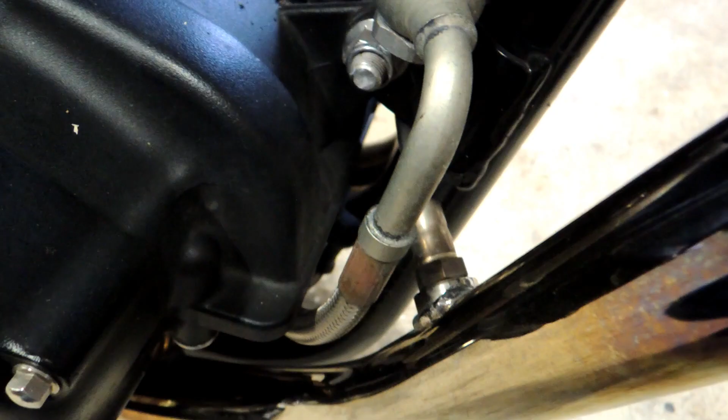So a little quick video here on oxygen sensors, or Lambda sensors if you're from the UK. They all work the same way whether you're driving a car, a truck, a motorcycle, whatever it is. They're all exactly the same. They work the same way.

And the point of an O2 sensor or Lambda sensor is to give the computer a reading on the oxygen level in the exhaust so that the computer can adjust the air-fuel mixture. And it would do that for two reasons. One, for emissions, so to keep emissions down, but also for performance.

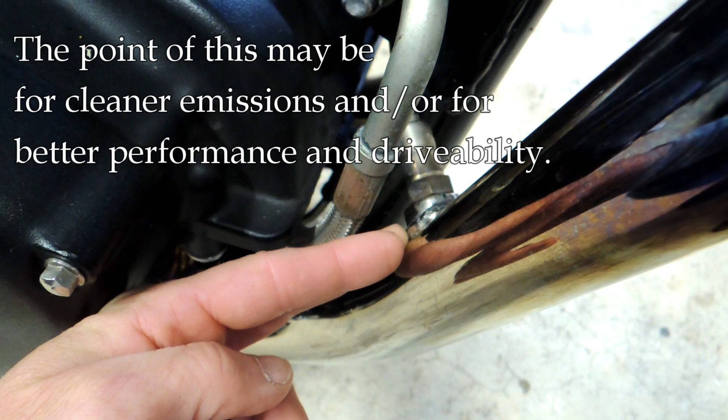So when you look at an oxygen sensor, it isn't necessarily just for an emissions thing. A lot of people try to remove them. Some computers are using it also for performance as well. So keep that in mind if you're thinking about removing one.

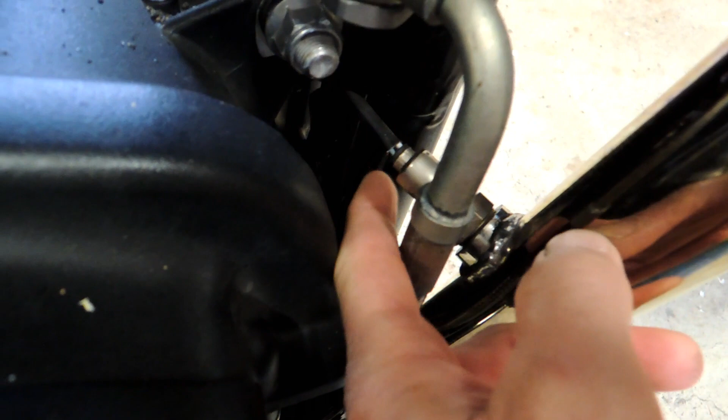All right, now oxygen sensors do have some different designs in one sense here. I'll show you some other bikes in a second, but this particular one right here has 3 wires, but you may see oxygen sensors with 1, 2, 3, 4, and I think there might even be a 5-wire sensor for different reasons. Now the point of this is that an oxygen sensor, the way it's constructed, it needs heat in order to work correctly.

So it's always mounted in the exhaust, pretty close to where the exhaust is coming out of the cylinder usually. And sometimes on cars you'll see 4 oxygen sensors, where you'll have 2 before the catalytic converter and 2 after the catalytic converter. And in that case, it's trying to measure the effectiveness of that converter.

But on a motorcycle, usually you have 2 or sometimes 1, or sometimes 1 for each cylinder. But in any case, you'll see different amounts of wires going to the sensor. So the different wires are for these reasons. If you have a single wire oxygen sensor, that has a signal wire, and that's just a voltage being applied to that wire, and then it uses the exhaust system itself as a ground back to the battery. That's a single wire O2 sensor.

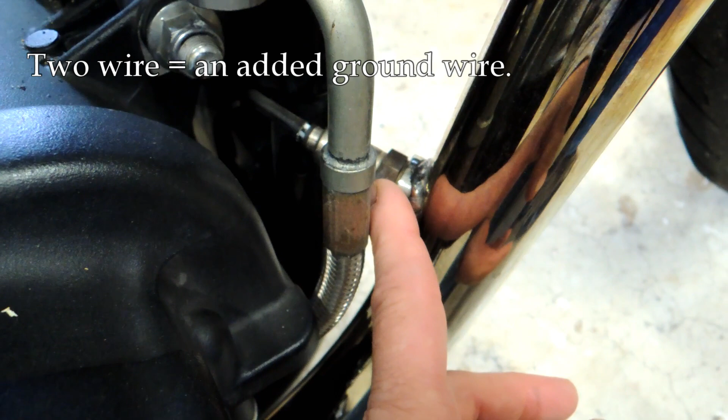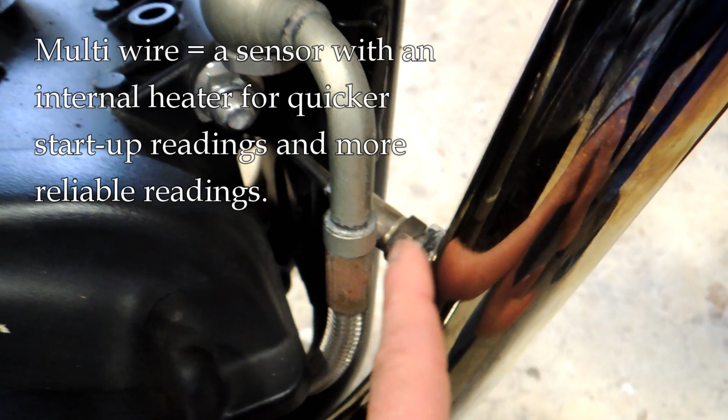If you have 2 wires, then it has a signal wire with the voltage, and then another wire which acts as the ground. So it doesn't use the exhaust as a ground, it has its own ground, which is usually more reliable. If you have a 3-wire or a 4-wire, that has a heater built into the oxygen sensor itself. So you have 1 wire for signal, 1 for ground, and then another one for a heater that's built into the oxygen sensor, and that heater may also have its own ground, which is the 4-wire.

And the point of that heater is that it wants to heat up this sensor quickly, so when you first start up the bike, it starts heating that sensor for you rather than waiting for the exhaust gases to heat up the sensor. And that gives you a more accurate reading immediately rather than having to wait 4 or 5 or 6 minutes for it to heat up. So that's just a different design philosophy, but they all work the same way.

And the way the signal works is the computer wants to see a voltage between 0 and 1. So as this sensor is measuring the gases, it's going to vary that voltage back to the computer, and the computer interprets that voltage change as different oxygen levels in the exhaust system. So typically you're going to see the reading somewhere in the middle of that 0 to 1 volt range. You're going to see 0.4 to 0.6, or 0.7 or 0.8 sometimes, but you don't normally want to see an extreme. So it's normally somewhere in the middle there.

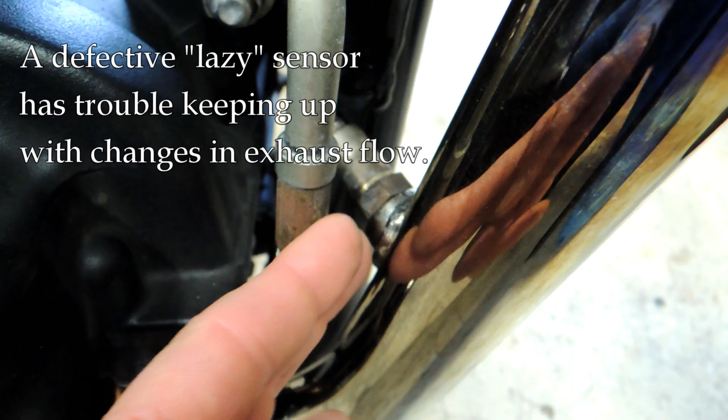And if the sensor is working correctly, as you blip the throttle or change RPM, you're going to see the oxygen sensor respond if you're reading it on a meter. And an oxygen sensor can also sometimes be working, but not working very well. Those are sometimes called lazy oxygen sensors, and basically the sensors become kind of mucked up inside, and it doesn't respond quickly to changes in the exhaust. But you do want to see it respond quickly.

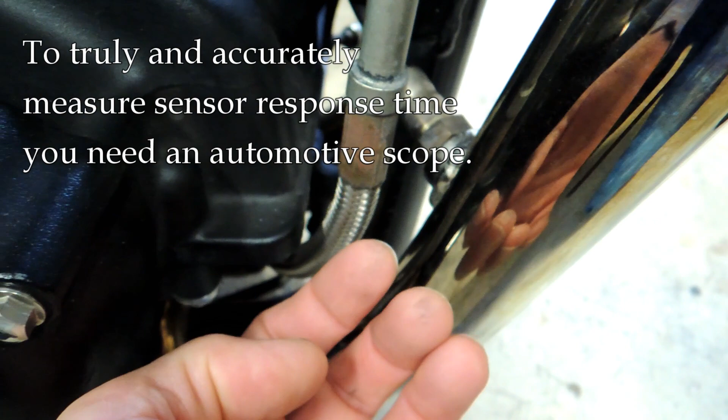So if you're looking at a meter and you're blipping the throttle and you're not really seeing the oxygen sensor respond quickly, there's a delay and it's kind of slow, that could be a problem as well. So even though it's working, it's not working well enough for the computer.

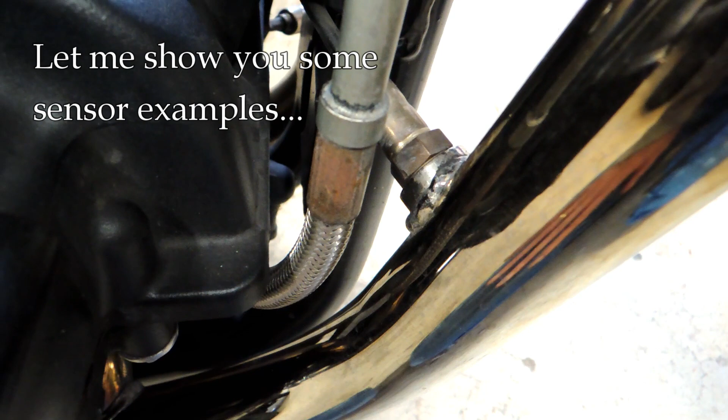So basically, the oxygen sensor has a signal wire that's important to you as far as testing it, and it needs to see a voltage between 0 and 1, and we want to see typically somewhere in the middle, and we want to see a quick response. Those are the things we're going to be looking for as we actually test one of these.

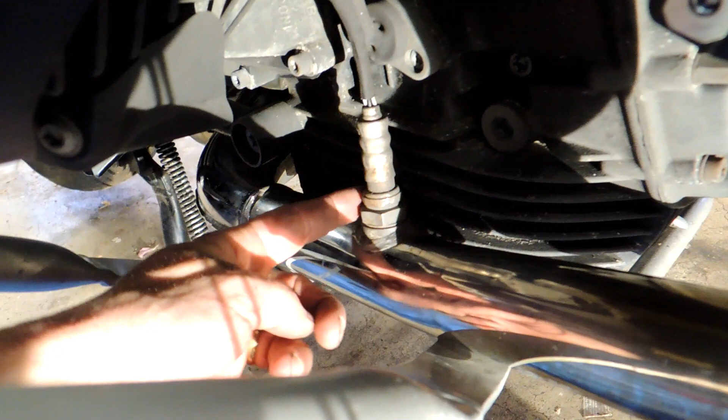Now here on the Triumph Bonneville, the oxygen sensor is located again. Here's the exhaust, here's the sensor, and then this is also a three-wire sensor there, and of course there's one on the other side. It's always a duplicate. Now here on the R1200 RT, which is similar to the GS, here's the cylinder head, right? Here's the exhaust that comes out, and the oxygen sensor is right here. Now this one is a three-wire sensor.

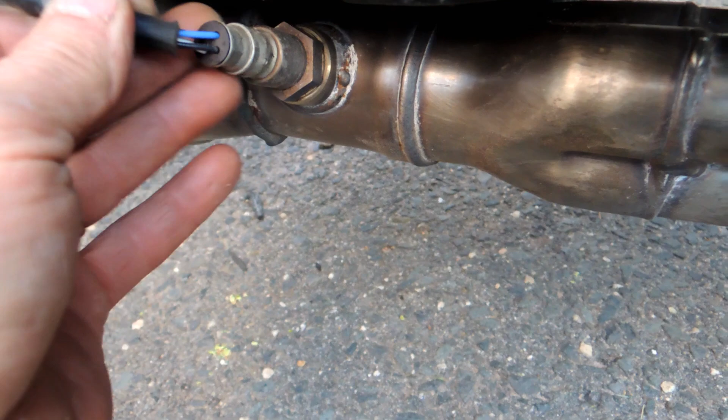Now here's a Yamaha FZ09 or MT09, same thing. Again, here's the exhaust coming out, and it has a sensor right here. This is a 4-wire sensor. Here's a Triumph Tiger 800, and the O2 sensor is buried behind this little guard here. So that's a little difficult to get to, but it is there.

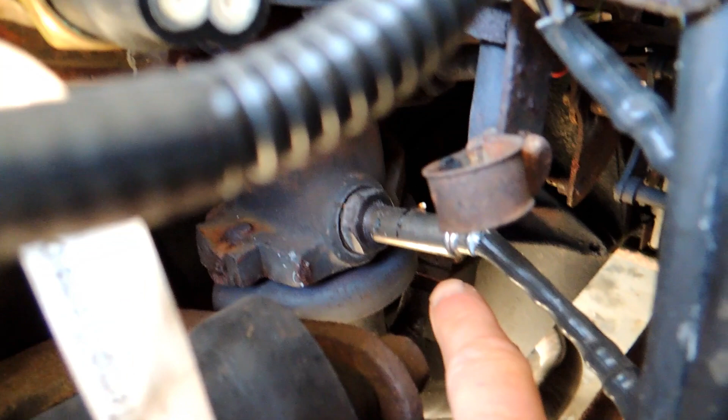Now, you're not looking at a bike here. This is an old Jeep Wrangler, it's actually a 1990. And if you look down here at the exhaust, here's the oxygen sensor. Whoop, where am I? There. So it looks exactly the same as a motorcycle because it is the same as a motorcycle. Oxygen sensors, whether it's automotive or motorcycle, are all going to be basically the same, and they all look the same.

Before I get too much further into this, I'm going to focus on testing these things, and we'll be testing them in the vehicle or the bike itself. However, I just want to mention, if you do need to remove one of these to replace it, there's two ways of doing it. You can see the hex nut there, which is part of the sensor itself. Ideally, you'll remove the connection to the computer, the wiring here, and then take a box wrench or a spanner and slip that over the wiring so that you get it connected on the nut here.

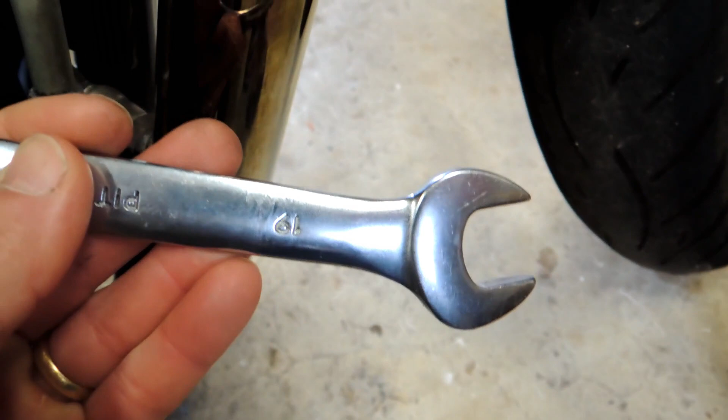And then because this is an exhaust system, it gets hot and these things tend to get ornery trying to take them out. So ideally, you have that box wrench around it, and you just give this end of the handle a whack with a hammer or your hand, and that will usually loosen it. I don't recommend using a long pipe or something like that because you may distort the exhaust or even break off this connection to the exhaust, which is welded on here. So ideally, you get a box wrench on there, give the end of the handle a good whack or a few good whacks, and that'll loosen this.

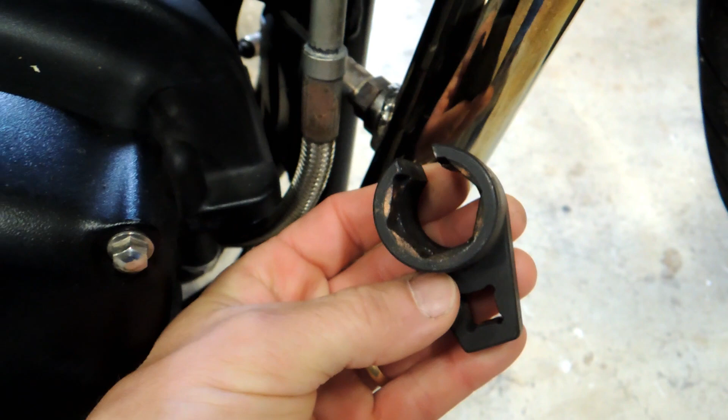And then when you put the new one back in, it usually comes with a little bit of copper-based anti-seize on the threads, and that'll help for the future getting this out. The other thing you can do is they do make a special tool, so if you can't get a box wrench around it, you can buy one of these tools, and this has an area right here to slip over the wire, and then kind of a socket here, and then you put your socket wrench on this part right here. They work pretty well, but the box wrench is my first choice if I can.

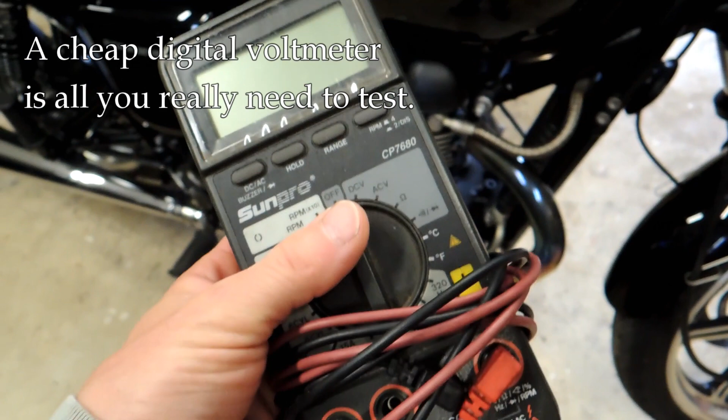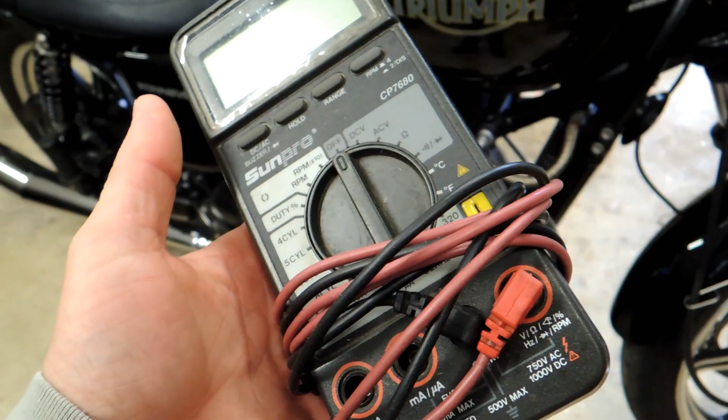Now, as far as testing these in the bike, there's two methods you can use. One is just a regular meter, we just need a voltmeter, and any old thing will do. It doesn't have to be particularly special. Digital is fine, and I'm going to show you this. I think I'll actually test this in a car just because it's easier to get to, but you can use just a regular voltmeter. The other method would be to use software on a computer or sometimes on a phone that's connected to your bike so you can see what the computer is seeing.

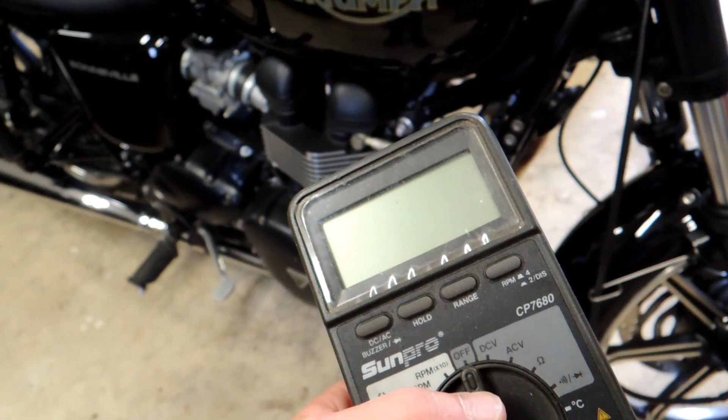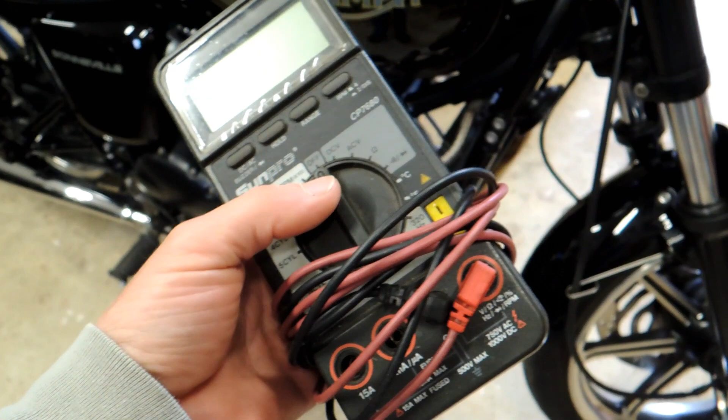And in one sense that's superior only because you are seeing what the computer is seeing rather than what a meter is seeing, because there are other areas in the wiring that could be a problem that you could catch if you're looking at what the computer is seeing rather than what the meter is seeing. But if you're going to use a meter, all we need to do is connect it to the signal wire, and that's it. If you're going to use the computer, then you need to have the software available to do that.

So I'm going to show you here on my Triumph. There's free software available called TuneECU you can use. I'm going to show you a BMW, and there's different software for that. I'm going to use a special device for that. All right, first up, I'm going to use this Jeep as an example just because it's easier, but I swear to you, they're exactly the same.

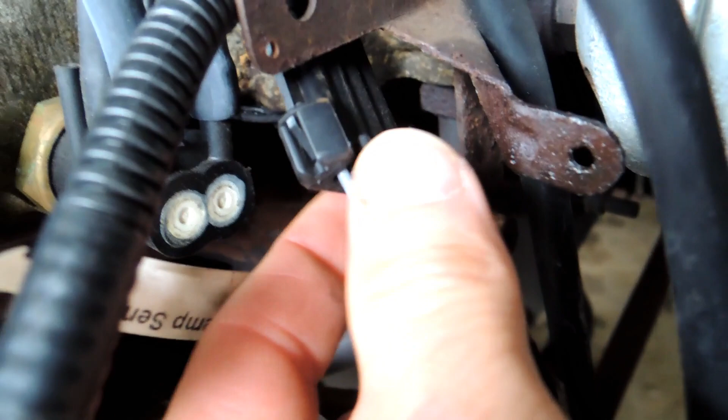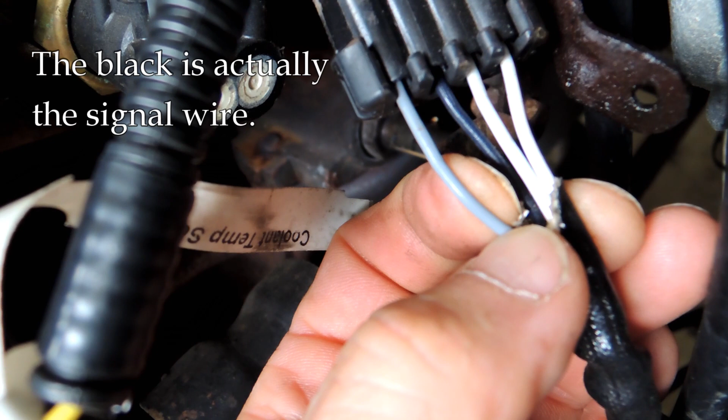So I look under here, there's my oxygen sensor, here's the wires coming out, but it has easier access. So here are the wires from the oxygen sensor. There's two white, a black, and a gray. I'm suspecting the gray is the signal wire, but I'll just keep checking until I find the right one. I am going to ground to the battery first. However, you may want to use the ground of the sensor itself if you're checking the sensor, because that could be bad. So, just something to keep in mind. But for now, I'm going to use the battery.

So I'm going to use a piercing probe so I don't have to disconnect anything. Let me show you what that looks like. If I come back out here, this is a piercing probe. And the way they work is you squeeze this, and that opens this up. Well, let me get that in focus. There we go. And there's a little pin in there that pierces the insulation of the wire. So that allows me to connect to the wire here without really destroying anything.

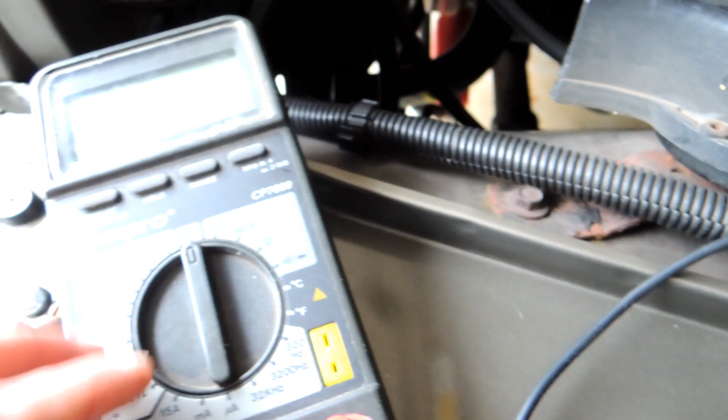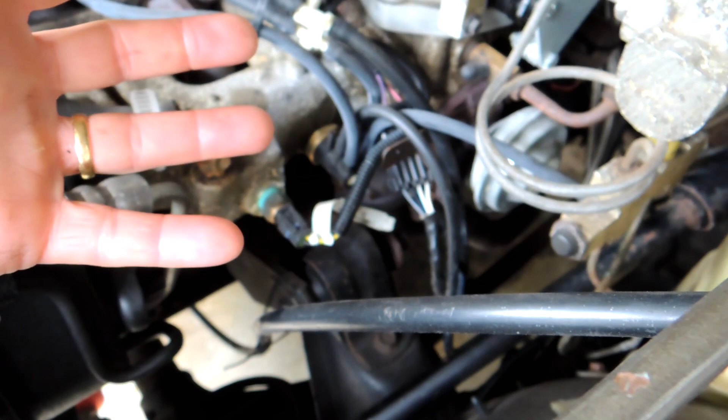And I have my meter set up, or I will shortly here. Now this engine is cold, so I'm starting this up cold. It's a 4-wire sensor, so we know it is heated, so it should start heating pretty quickly. Nevertheless, I expect to see some changes as the engine heats up.

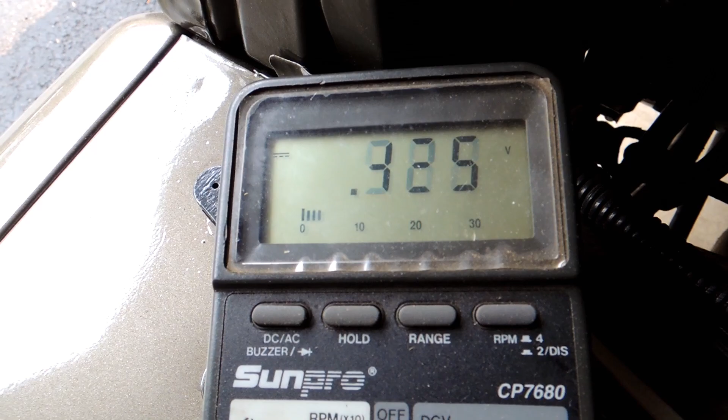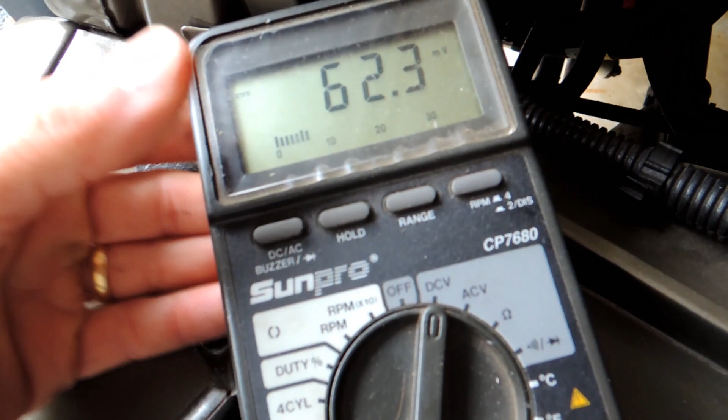Okay, I gave you a chance to watch some of that, and the engine got a little bit warmer. It's only been running 5 or 6 or 8 minutes, but it's enough to get warm. And you see there, this oxygen sensor is not doing well. So this is actually a good illustration. You saw this thing cutting out from time to time. It's possible that was just a connection here, although I was playing with it and I didn't really see it change when I did. I tried several other stabs at it, and it stayed about the same. So it is possible I have a problem with the wire itself.

But in any case, you saw the numbers were jumping around quite a bit, and they were down in the 200s and up to the 600s and back. That's not normal. And when I blipped the throttle, it wasn't responding, so that is lazy. So this oxygen sensor is not working right. And that's a good example. If you see the numbers jumping around crazy like that, or it's not responding fairly quickly to the blips in the throttle, then something's wrong. So this oxygen sensor needs changing. So that was a good example.

Now, this is a car, but if you're on a motorcycle, it's the exact same thing. It won't look any different if there's a problem. So that was a good thing. So now I'm going to move on to some of the other bikes, and we'll try some of the software and see what that looks like.

All right, now we'll test this Triumph Bonneville, and I'm connecting to the diagnostic connector with this cable here, and I'm using the computer. I'm not connected yet. And I'm using TuneECU, which is a free software you can get. They also make a version for phone now, Android I think it is, but I'm using this on a laptop.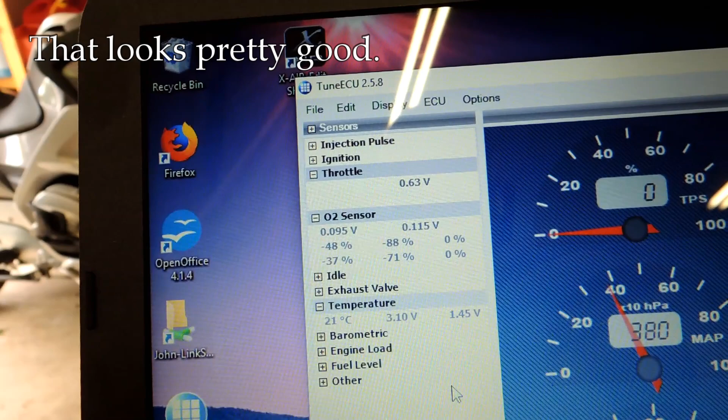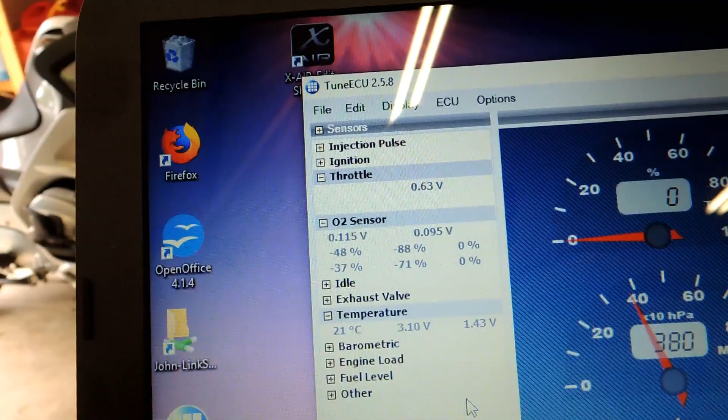All right, I had to turn the engine off here to even talk. So, actually, I'm seeing some things here that I'm not super thrilled about. So, I got to figure out which side is which. There's two sensors on this bike. This one, you would have noticed, seemed a little bit odd. There were some odd readings in there.

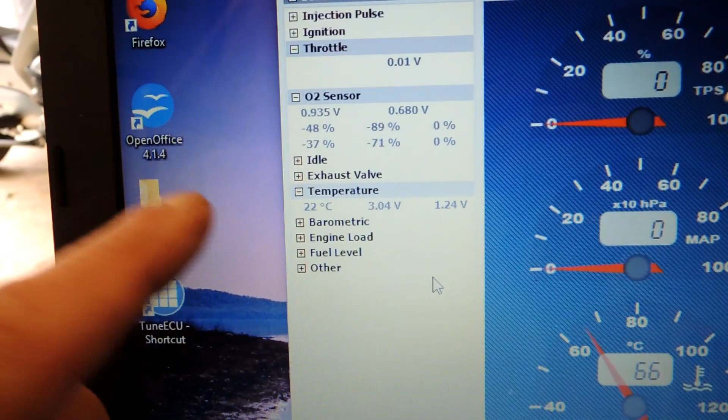Now, I don't want to read too much into this because this is software, and there is a delay in getting from the bike through the cable into the computer and the software reading it. So, it's not an immediate reaction like a meter is. So you got to be a little bit careful there. But, as I first turned it on, the voltage was very high, over 1 volt, which is fine because I just turned it on, everything was cold.

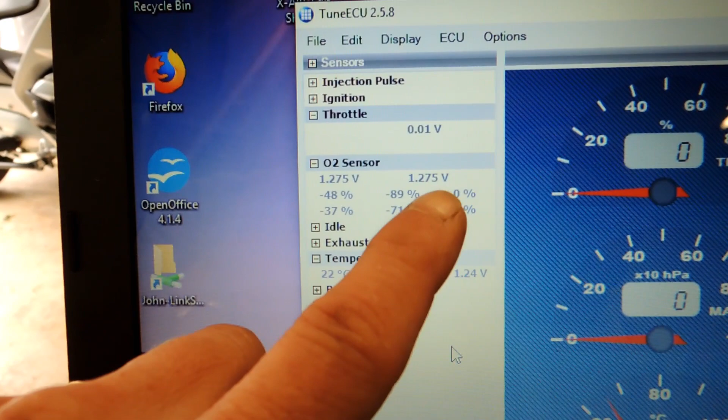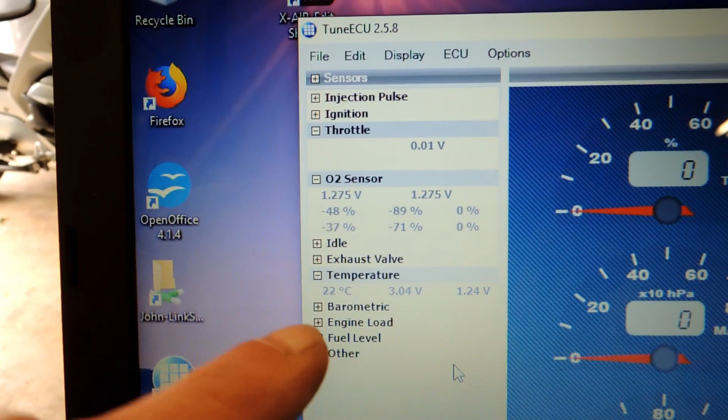But then as the engine started to warm up a little bit, I started getting normal readings in the middle there. But this one, I don't know if I want to call it lazy, but it was just jumping around a little bit different than this one was, and a little bit more than I would want to see. So, given the results that I'm seeing here, I might want to put a meter on that particular oxygen sensor and see what the meter says.

And if I'm getting oddball readings from the meter, from the voltmeter, then I might want to change that out. But honestly, if you're going to change one, you're going to change both because they are the same age. And I would expect the other one to go bad soon too, if it is bad. So I'm not saying this one's bad, but it is a little bit odd. So I want to check that a little further with the meter to make sure I know what I'm looking at there.

All right, now we'll try a different Triumph. This is a Triumph 800 XC. And I got to get connected here, but I'm going to use the same software for this setup. The Triumph bikes, a lot of them can use this software for free. So we're going to get this set up and we'll take a look.

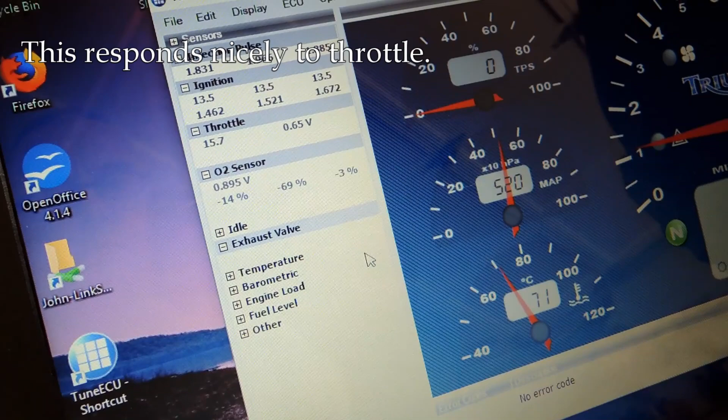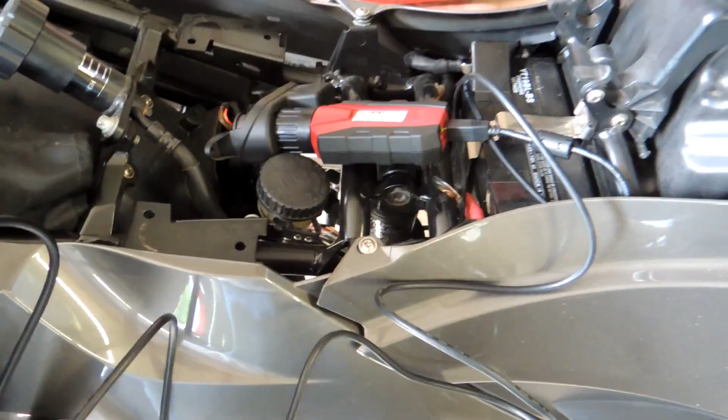All right, the last one we'll test will be the BMW R1200 RT. All these BMWs with this engine are very similar. In this case, we have two oxygen sensors, or Lambda sensors, as they would call them. I'm using the GS911 tool, which connects to the bike and back to the laptop. And we'll take a look at this. Now, again, I'm looking at this cold, so it will change quite a bit as it warms up.

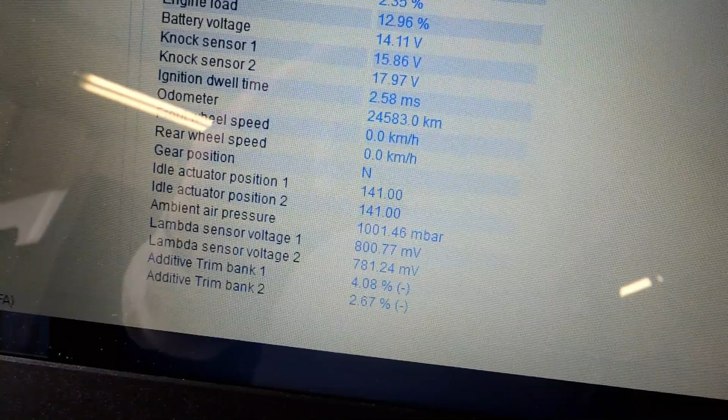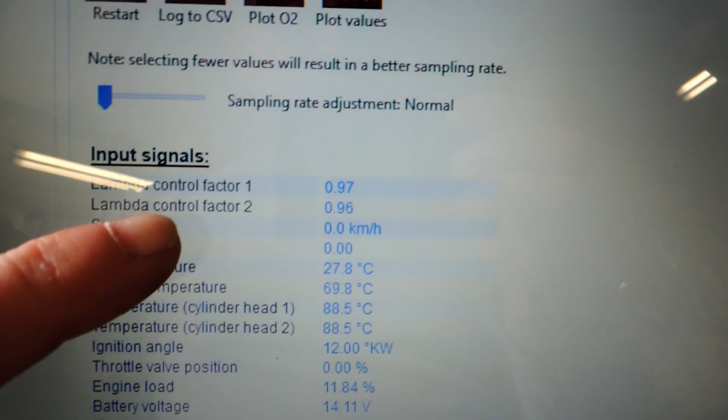All right, on this BMW, some interesting things. First of all, there's a Lambda or O2 control factor, which I think is just the voltage. I got to look that up actually, but down here the voltage is what we were looking at, and it was jumping around a little bit like the first Triumph that we looked at.

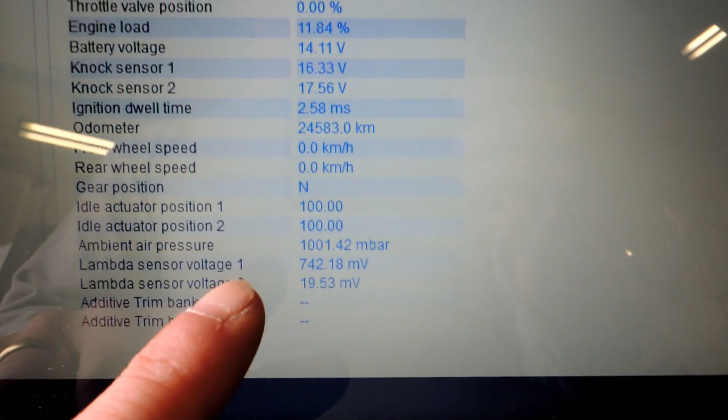Now again, I got to be careful because you're reading this in a delayed form, so it's not like looking directly at a meter. But when you see things jumping around oddly, especially if one of the two O2 sensors is jumping around a lot differently than the other one, then that's probably cause for further investigation, and I'd want to look at a direct reading off of a meter.

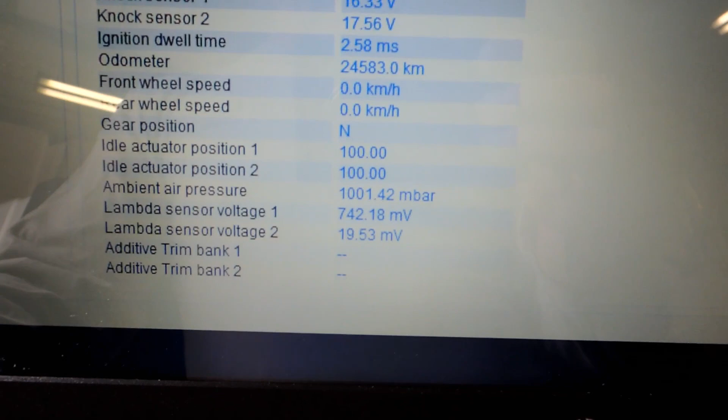Now in this case, it wasn't quite as bad as that Triumph. They did tend to even out when I had the throttle at 2,000 RPM, something like that. So they tended to even out. However, I did see some things jumping around that were a little concerning. So I might want to put this on a regular meter and see what I find out. But in any case, that's how you look at this.

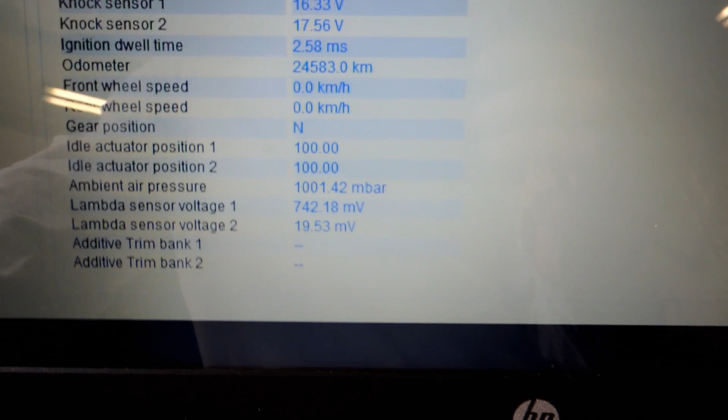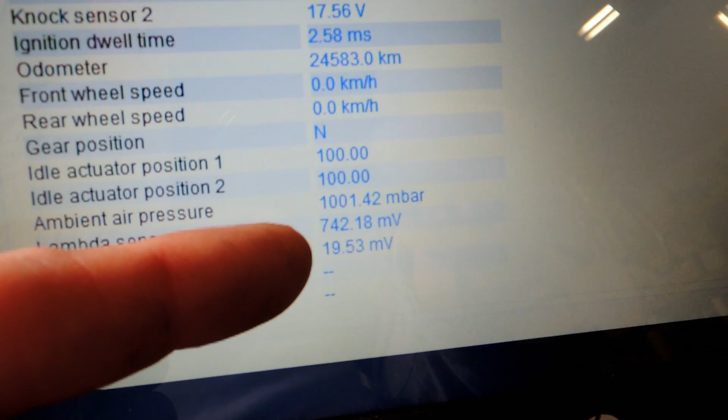If you have more than one O2 sensor, you want to see them roughly equal out. And you want to see when you blip the throttle, or when you have it at 2,000 RPM or 3,000 RPM and just suddenly drop the throttle, you want to see that response fairly quickly here. But again, just be careful because you're looking at this in a delayed form versus on a meter when you're looking at it in direct form.

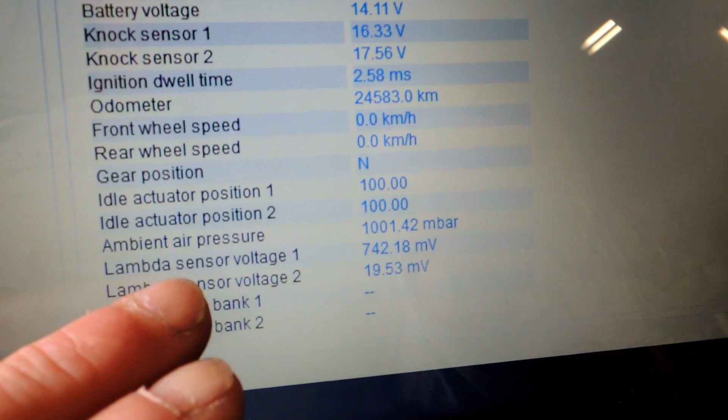So if you have any question when you're looking at the software and it doesn't look quite right or you're not sure, then put a meter on it like we did in the Jeep, and make sure you see what you should see there. You want to see a quick response. You want to see it in the middle of the range, and you want to see it reacting correctly.

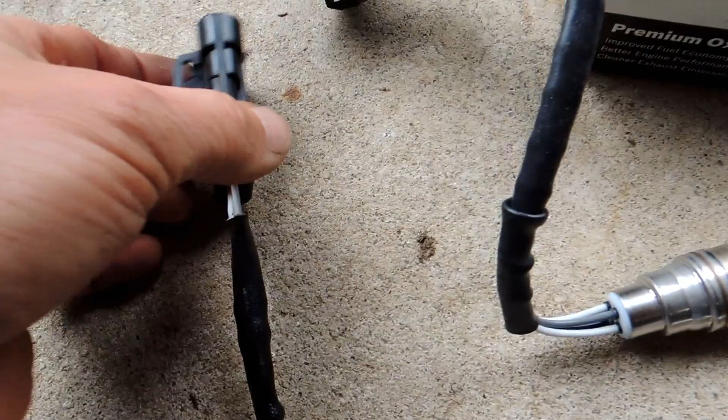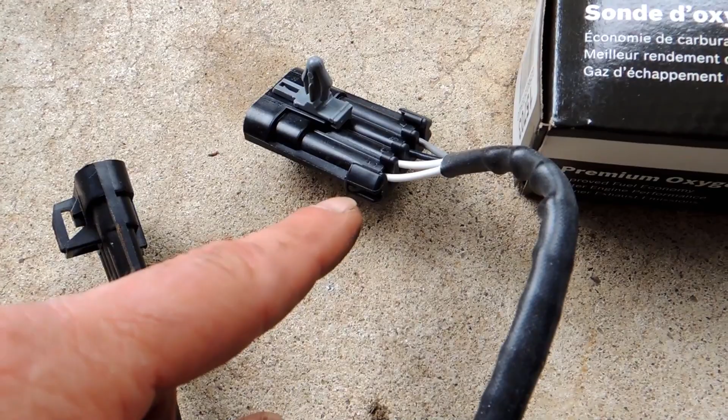If you're going to replace it, the important thing is the connector has to be the same, or you can buy universal oxygen sensors which have the correct amount of wires and the correct threading here, and everything else is correct, but it's not going to have the end on it. So what you can do is cut off the existing end and splice the wires back on to a universal type if you need to. But in this case, I could get the correct one.

So the next question is, how do these things go bad? Well, the wires can definitely get bad themselves. So you can get cracks in the wires, you can get breaks. You can have a bad ground, especially if you have a single wire oxygen sensor. The ground is kind of important, and that can be a problem because you're grounding through the exhaust itself.

Now these tips have the sensor, it's a ceramic sensor in there that can get contaminated. So if you have a lot of oil blow-by, that can be a problem. Silicone is known to be a problem. So it can get contaminated, and that is a frequent problem. And sometimes they just get old.

So the rule of thumb for automotive use is 30,000 miles if you have a single wire, 60,000 miles if you have a heated style, multi-wire. But for a motorcycle, I think that's a little bit different. I would bring those down because the exhaust on the motorcycle tends to run a little hotter, I would think. And it's a tougher environment.

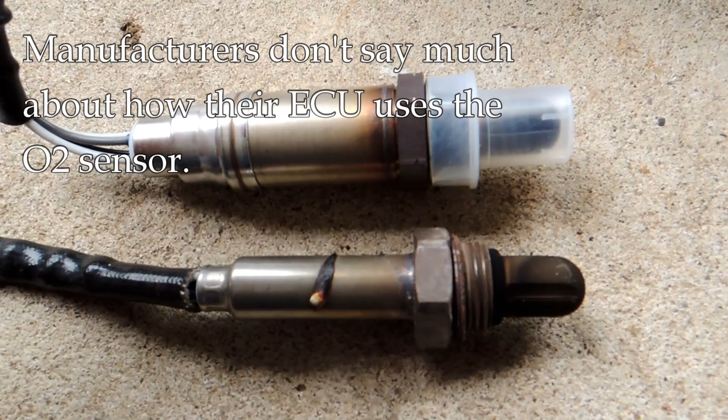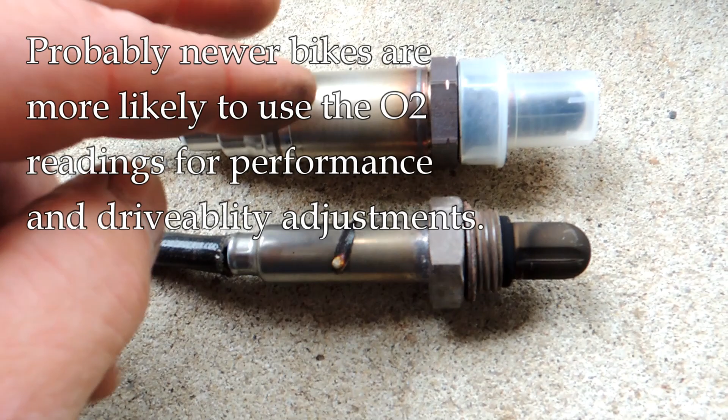So whether you should replace this or not also comes down to, what is this being used for on your particular motorcycle? Like I said, emissions is definitely part of this, and that may be the issue for you. But newer bikes especially are going to use this also for some performance. So the air-fuel mixture will be adjusted by the computer depending what it sees here, and it's not just for emissions is what I'm trying to tell you.

So older bikes, in the 2000s, maybe up to 2010, 2013, in that range, probably it's going to be mostly emissions, I'm guessing. But for bikes that start to get newer than that, this is going to start to get used for performance. So there are kits to take out the oxygen sensor for some bikes, but you are bypassing in a sense what the manufacturer intended to do with that computer. So I'm not sure that's really such a hot idea.

The cost of these is not great. This particular one here was about $50. That's about middle of the road. You can spend $20, you can spend $100 depending on the particular model.

And then when you install this, like I said, on these threads there's going to be some anti-seize compound. On this one, you see this plastic covering, which I'll take off shortly, and the anti-seize has been applied at the factory. Other times they'll give you a little tube of it, but don't use too much. You just want just enough to keep it from seizing up on you, but you don't want to contaminate anything else.

If you really want to get into it, automotive scopes, higher end scopes, can tell you more exactly if a sensor is lazy, for example, if it's not updating quick enough, and things like that. But for our purposes, what I've shown you in this video is usually enough to tell if the thing is bad or good. Whether you want to replace it or not, it's up to you, but at least you know now how to test one.